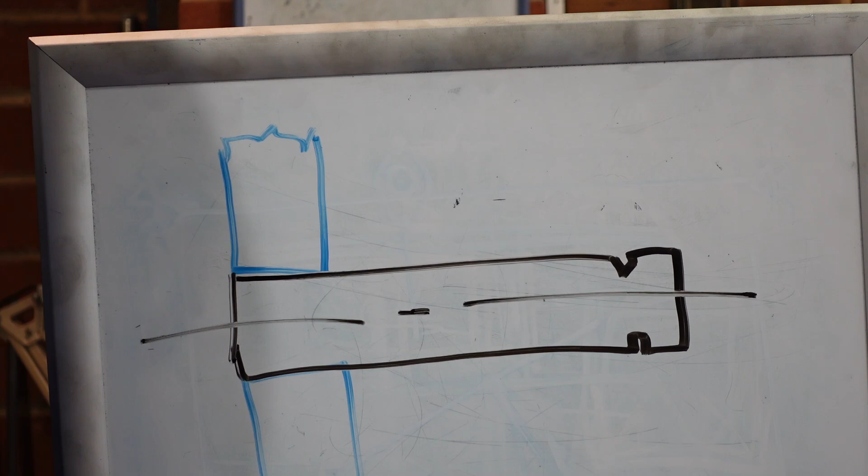There were two main suggestions for how to fix this. One of them was, couldn't I get the base plate, drill a hole in it, and push a shaft into it? And the answer is, well, yes, you could.

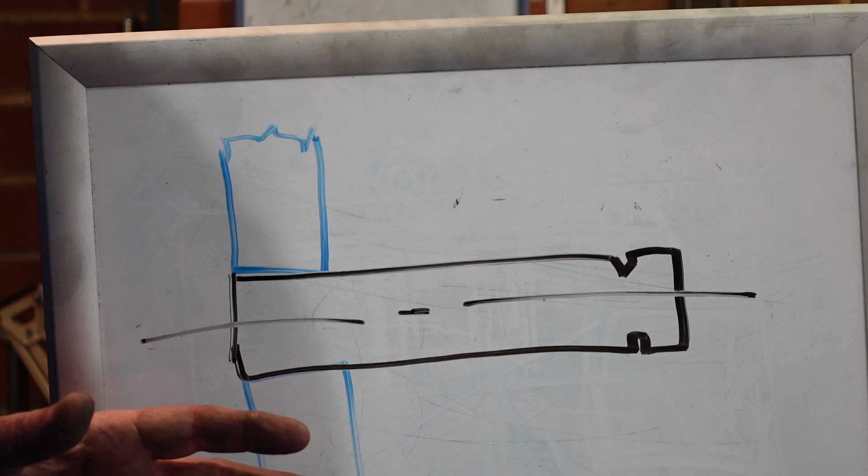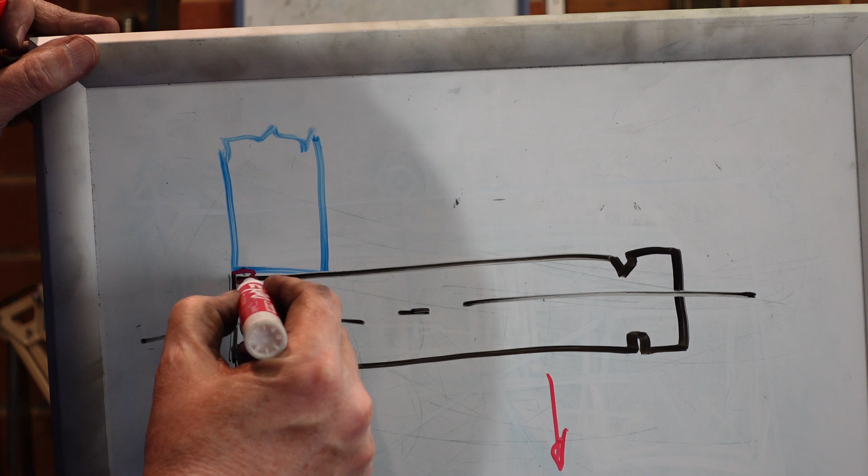With both the solutions people have suggested, it's possible to do them that way. But the problem is that as this thing is loaded, and we'll assume the load's going like that, you're going to get pressure there, and pressure there. This is only 7mm thick, so it's not very thick at all, and the load on a bandsaw blade can be quite large - you can pluck them and they'll make a note, so they're under a bit of tension. My concern with doing that is because this isn't very thick, it's going to pull down here, pull up here, possibly distort the material, and it'll come loose.

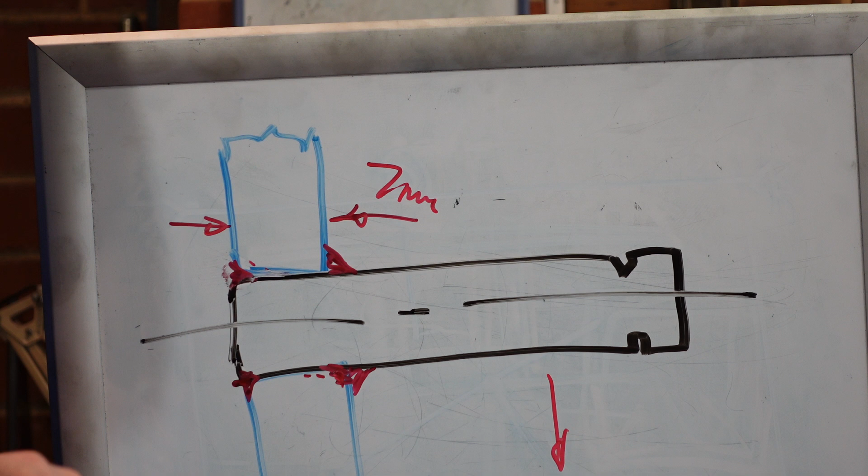If you're on a desert island and this is the only method you had to fix your bandsaw, well, you could do that. The way I'd probably do that is I'd put some weld in there - weld around there, weld in there - and that would probably do it. That'd get you something that could at least be used. Now, how long that'll last for, I'm not quite sure. It's going to depend a lot on how good your welding is, among other things.

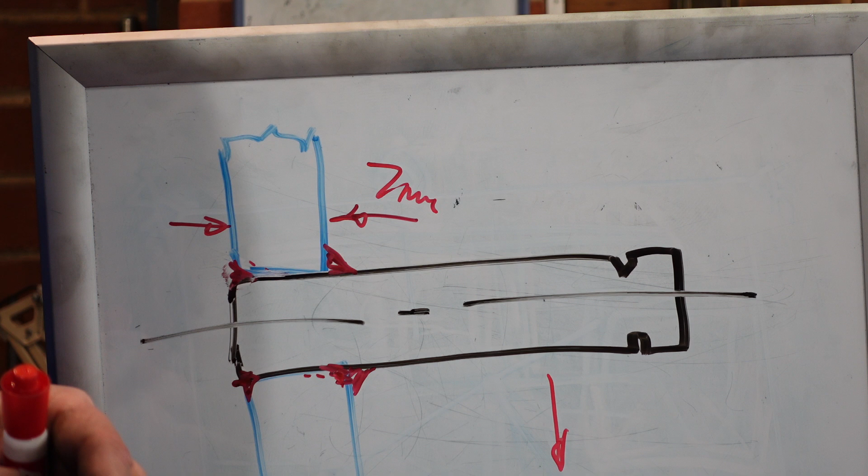The other thing to think about is that some of these steels, when you weld them, you take them back to an annealed state, and they might have been work hardened in rolling or something like that. So you need to be careful with this sort of stuff - you can't just say, oh yes, we'll slap lots of weld on it, because you could actually be making things weaker.

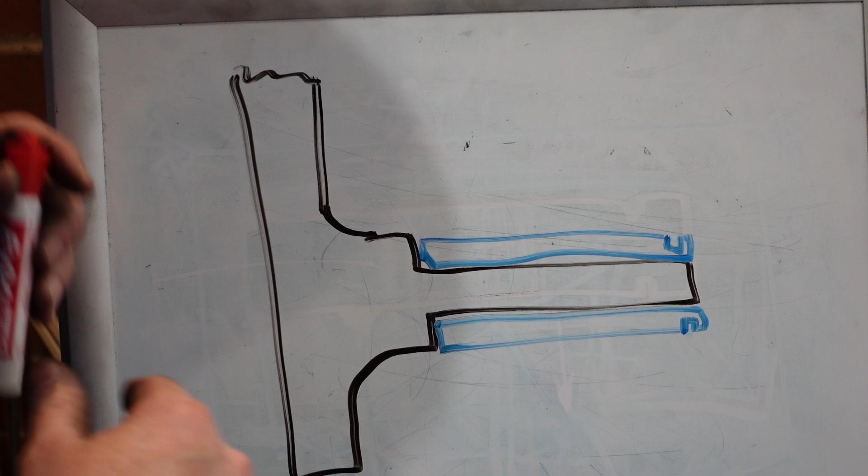The other suggestion made was, can you sleeve it? That one's a little trickier because of a number of things. Firstly, once again, if we put the load in there, on the original part, that's a diameter 19 shaft. It's got plenty of meat to resist those forces. It's got a radius there, so that lowers the stress raising of it. But what you've effectively got is you've reduced the shaft down to, say, 16mm.

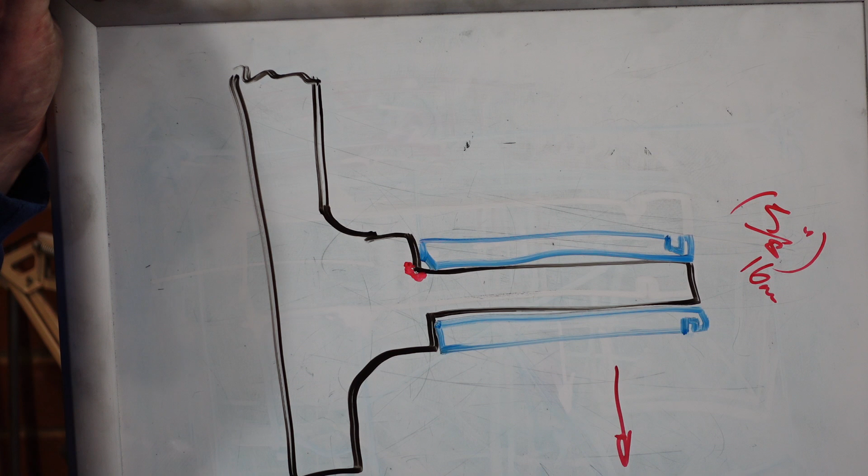Or 5/8 of an inch, maybe, whatever floats your boat. But what that means is that when the force is applied here, this is the corner that's going to have the most stress. And because you've reduced the diameter there, you've weakened the part. So there's something to think about.

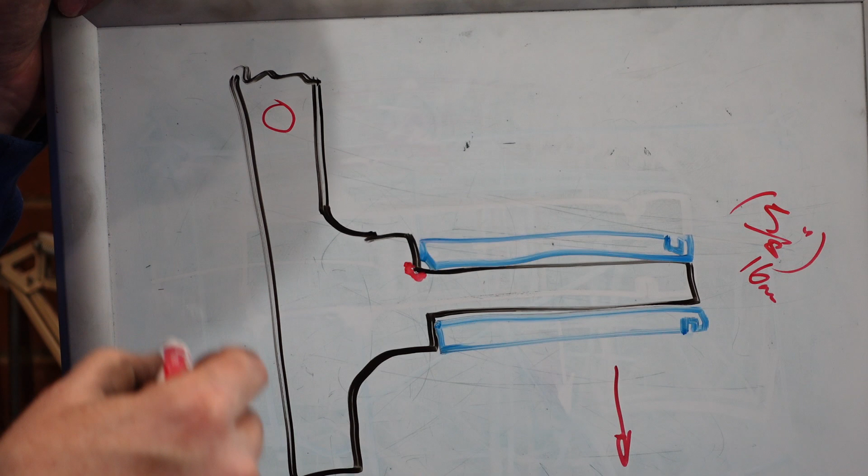Now, the other thing that needs to be thought about when considering sleeving is, to make the replacement part up, I had to turn one diameter accurately, and it had to be perpendicular to the hole through there. Not terribly demanding, though it took some time to get there.

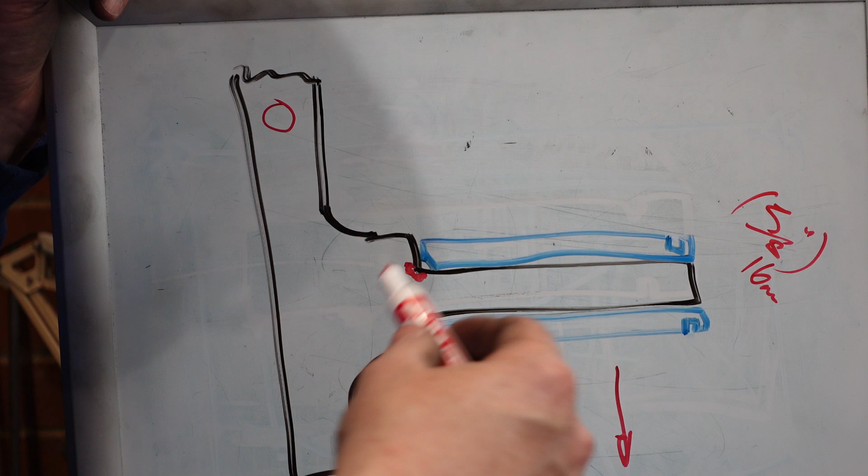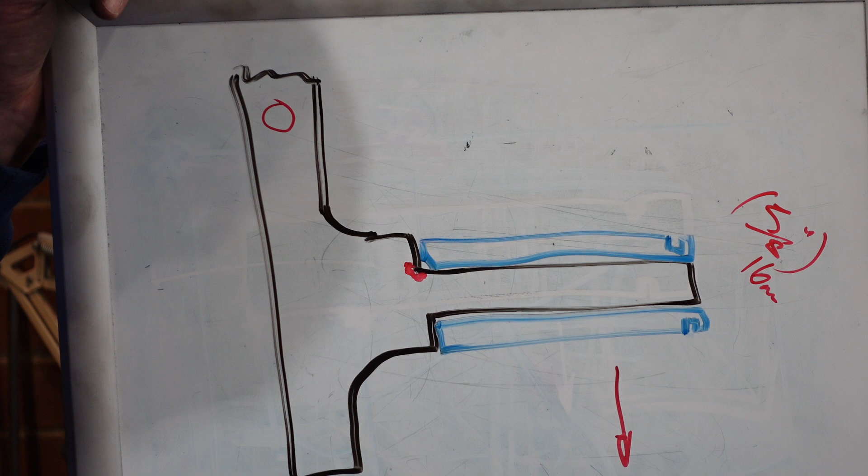However, if I sleeve this, I'd have to either bore or ream that tube, and then turn this piece to be a matching fit - it could be a slight press fit, or a slip fit with some Loctite. Once I'd done that, I'd then have to machine this outside surface. Now it's been suggested, well, could you just machine that to size, ream your hole in there, slide that on, everything's wonderful.

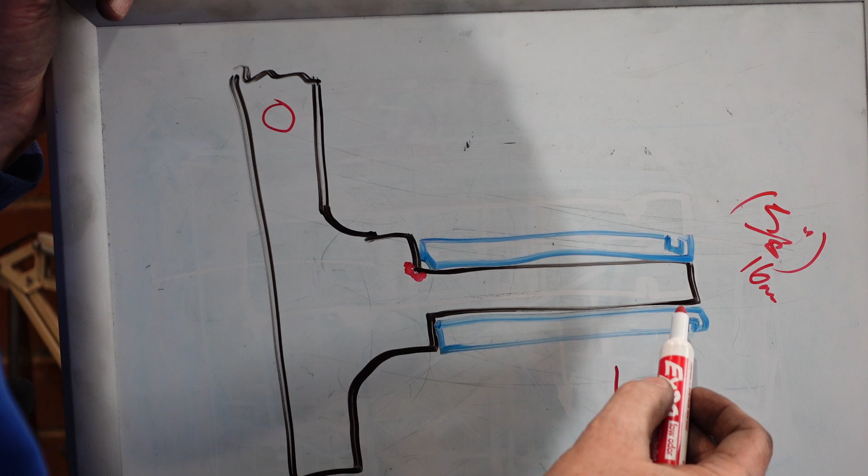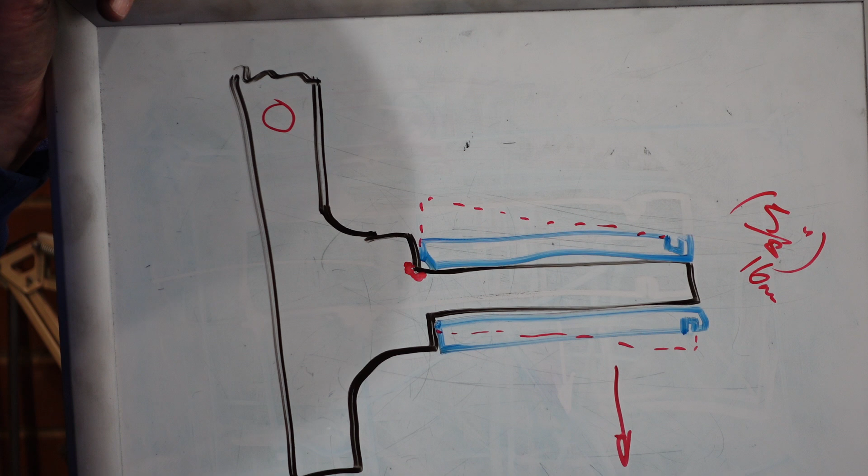Well, you could, if you're on a desert island and this is the only way you had to repair it - but there's a possibility that if your reaming isn't dead center, you might end up with this thing doing that. So there's a possibility that may not line up. Now, as I said before, because this is pivoting, this direction doesn't matter, but the other direction may, so you've got to watch that one.

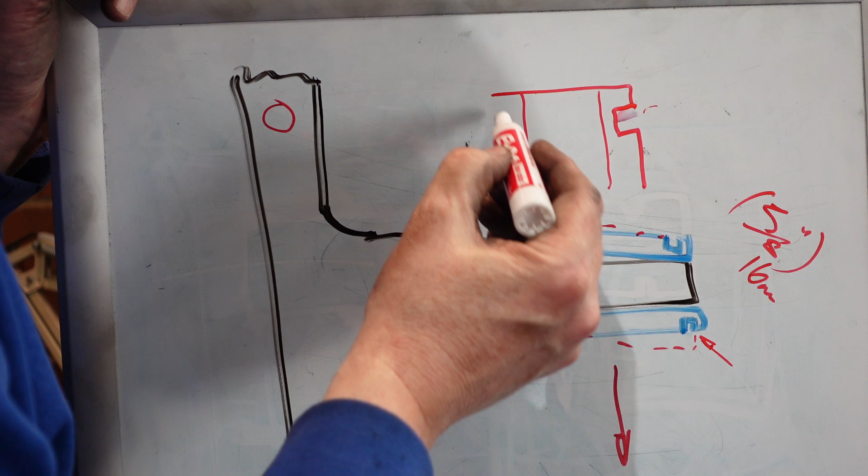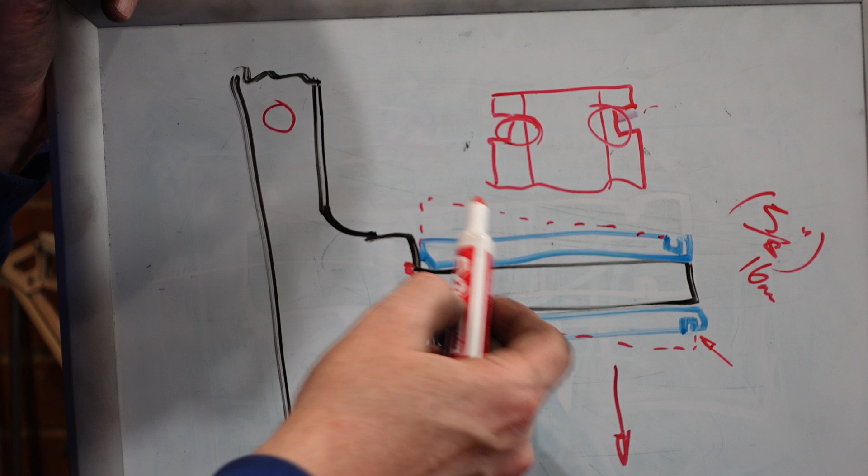The other thing is you're still going to have to put this up to put that circlip groove in there. Think about what that's going to look like - when you push that on, the weakest spot is going to be through here. So when you push that, unless your fit is just right, you might end up crushing this circlip groove. So you're going to have to put the circlip groove on later. But there are other problems too.

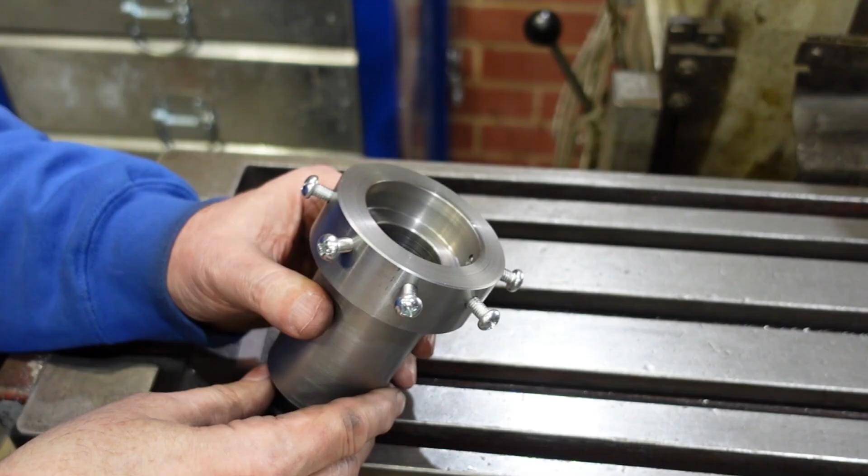If you remember when I made this heavy-duty die stock up, I heat shrank a sleeve onto the outside of this part as it was, because I wanted to get a little bit more meat for these screws.

Now, one thing I didn't show you, but I found interesting, was that when I bored this out before I put the sleeve on, that was 2 inches and about 9 thou. When I put the sleeve on and remeasured this - stone cold at the moment - it's now 2 inches and about 5 thou. So I've lost around about 4 thou, a tenth of a millimetre, just by shrinking that sleeve on.

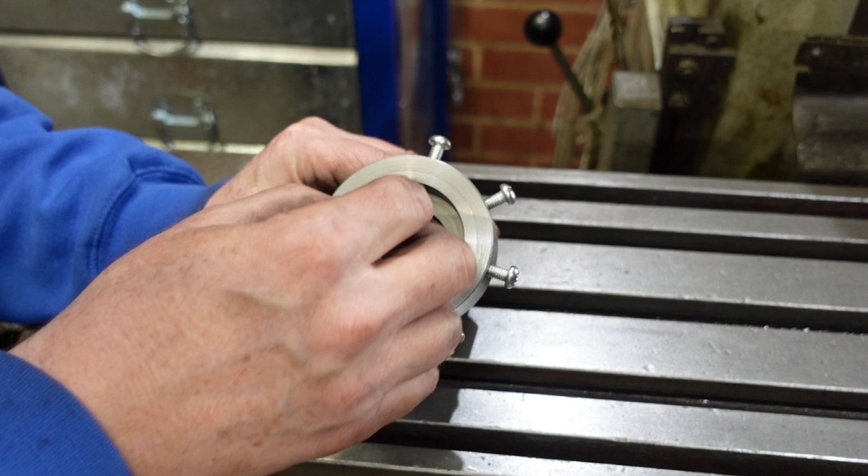Now when you think about it, that makes sense, because you've got a thin bit of material here being compressed by this sleeve and pushing back, and a thin bit of material here being pushed out by that and pushing back. So I would expect that this inner diameter is going to shrink a little bit, just because I've now got a compressive force on that.

So if you think back to the idea of sleeving the shaft, it means you're still going to have to machine the OD of the spigot once you've got it in there, because if you've got any sort of shrink fit on there to make that hold, it means you may have changed the dimension of the outside shaft.

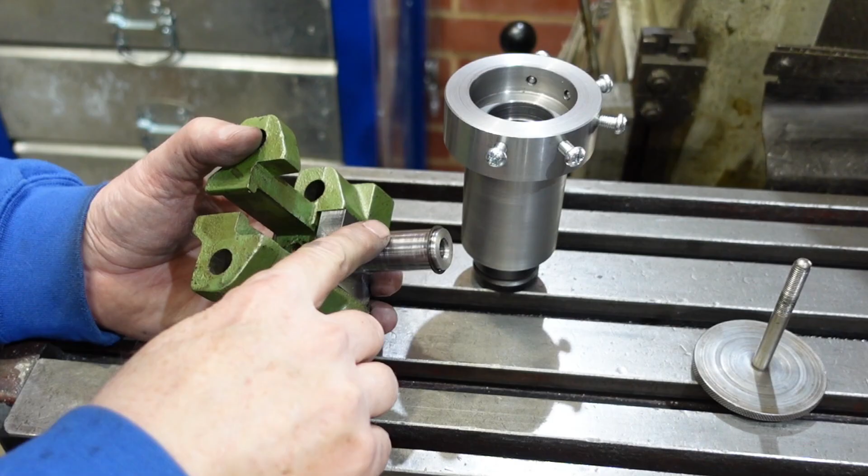Now that's for a bearing. When I made this, I was about 6 thou over, and I had to take that down to basically nothing to get the bearing to fit. Now, two things there: one is that a bearing is going to be very much like this, whereas if I have this oversized and force the bearing on, it's going to push the inner of the bearing out, which might make the bearing stiffer and possibly even jam up.

And I've had that happen to me before I realised what was happening. Okay, but what that means is that...

If you turn a sleeve nicely to size and then shrink fit that on or whatever, it's not going to be to size anymore. If you use Loctite, you're possibly a bit better off, but one of the problems with that is, well, how long is it going to last? Is it going to last? So there's the aspect of, if you shrink something onto a reduced diameter spigot, is it going to be the right size once you finish putting it on there?

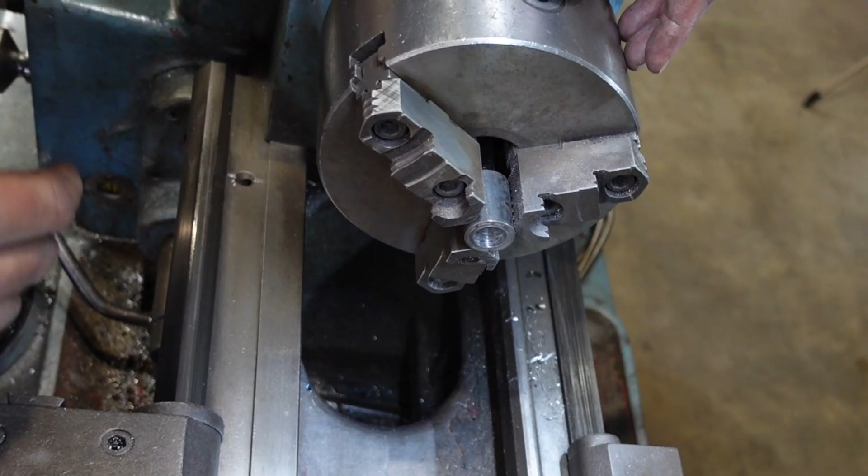This last one's one that I've been caught by myself personally, so that's why I'm telling you about it. I've got a bit of 24mm black bar in here, and I've drilled a 5/8 hole down the middle just to pretend it's a bit of pipe or something like that. I'm now going to drill that with a 20mm drill just to take it out to a 2mm wall thickness, and then I want to do some measurements.

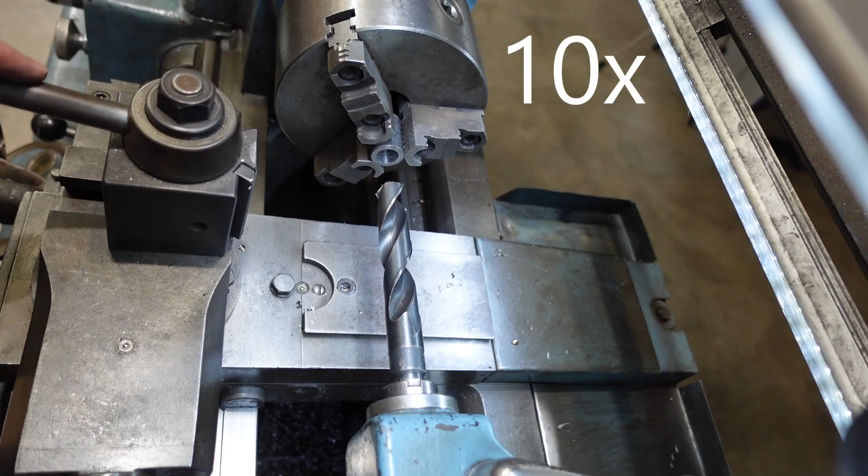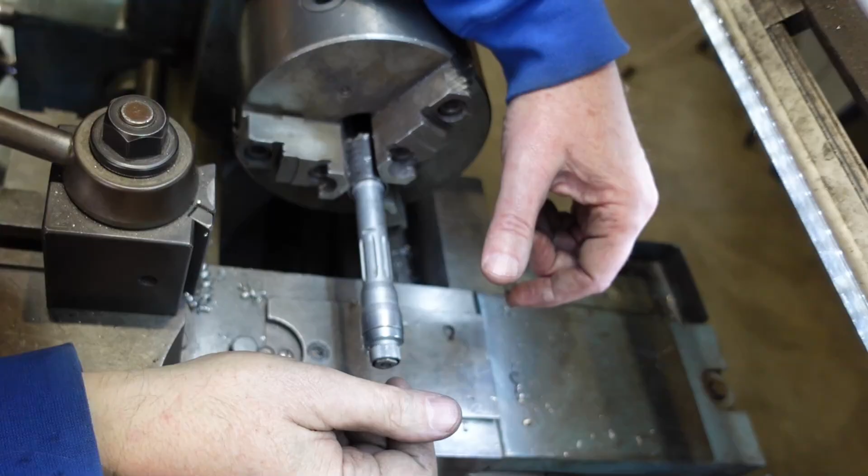Now that was a bit embarrassing because I grabbed the 22 instead of the 20mm drill and drilled this out. So I've only got a 1mm wall thickness, but it illustrates the point.

I've got a 3-point mic here, and when I measure the tube here, with the points of the mic against the jaws, I get actually 21.82. Now, when I put this in here, I did this chuck up as tight as I could, because I didn't want it spinning. You can see it has spun. I'll show you that in detail in a minute.

But the important thing is this: if I back that off and then I move these so that the points of the micrometer are between the jaws, I'm getting 22.32 millimeters. What's happened there is that the pressure from the jaws has squeezed the material in. You've taken out the stuff in the middle, which has relieved some of the strength, or relieved some of the stresses. And so what's happened is it's bulged out here.

So if you're making up a sleeve to go on something, you can't just hold it in a chuck like this. Ideally you've got to be working on your sleeve out here while the stock is carried in the chuck. That then brings into all sorts of problems with reaming into a blind hole and all the other bits and pieces that you might have to worry about.

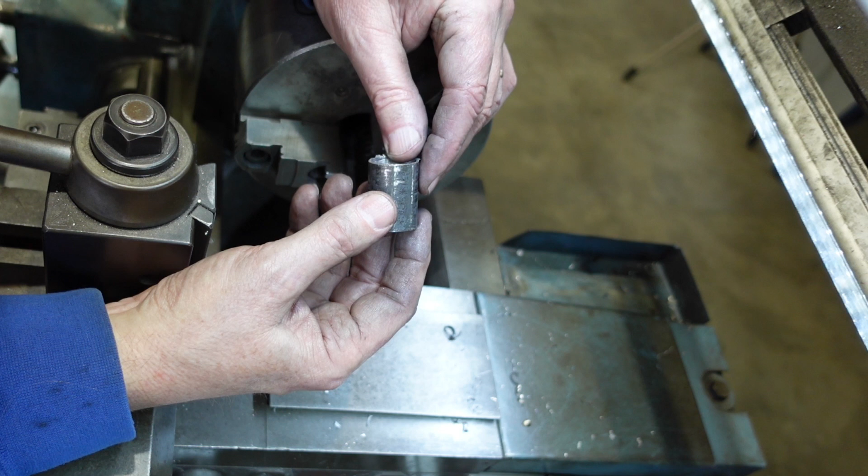Now there's that bit of black stock, and it was nice and uniformly black and all that sort of thing, but you can see it spun in the chuck, because as soon as the material was relieved out of there, suddenly the material could self-relieve in terms of stress, and there's no clamping force. Now if I'd stopped halfway through and said, oh gee, it's spinning, I'll clamp it up a bit more, I would have made the problem worse. So that's just something to bear in mind for doing this sort of work.

Now that half a millimetre of movement between the good bits and the bad bits is obviously no good for fitting a bearing, but you imagine you've got to keep that to within 10 microns or so. This isn't going to cut it. So they're just a few of the reasons why sleeving or welding in a stub shaft, yeah, they'll get you out of trouble, but they're not necessarily the best way of doing things.